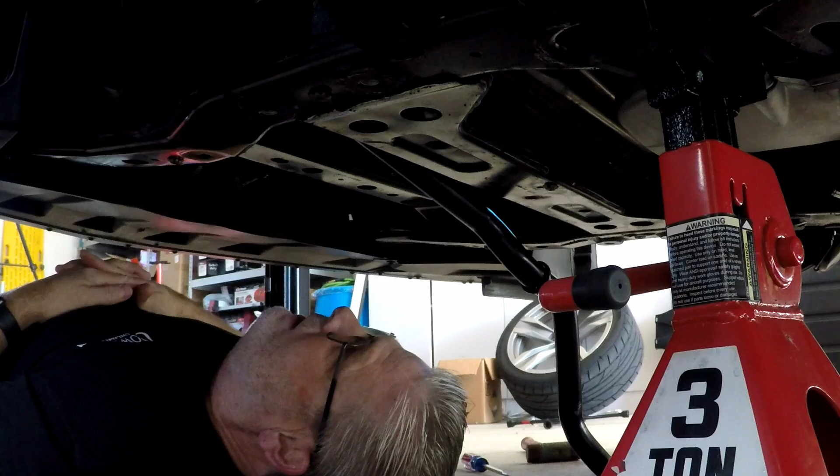This is not easy on the ZL1, folks. The electronic steering and the intercooler pump really make this difficult.

So on the ZL1 they have this belly pan here. That's going to have to come out because this is the front sway bar. So first thing we're going to do is take all this out. It's just one big piece, a bunch of screws.

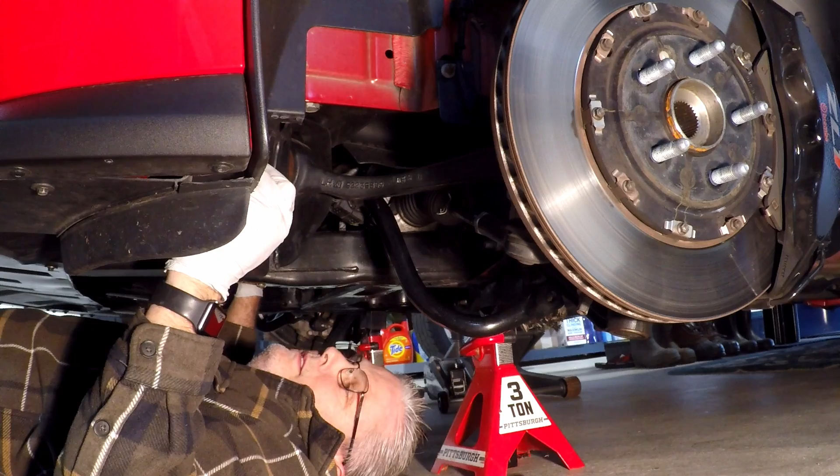You know, Vic, you were right. It would have been easier to do sway bars when I had the whole front end and the steering thing out and all that.

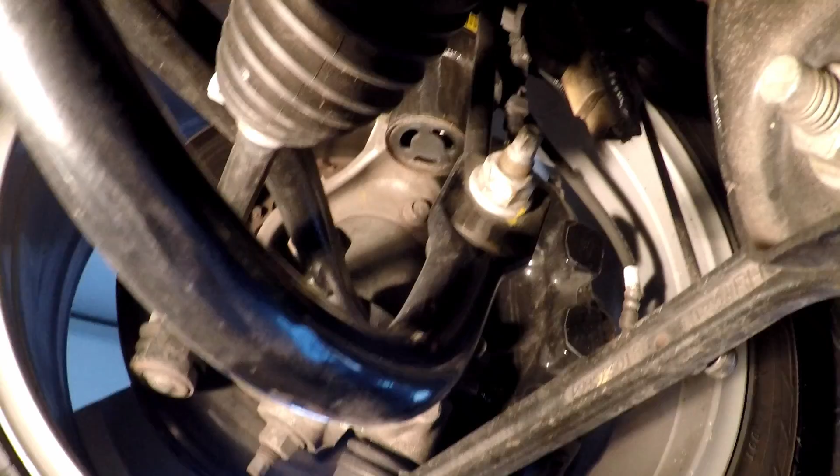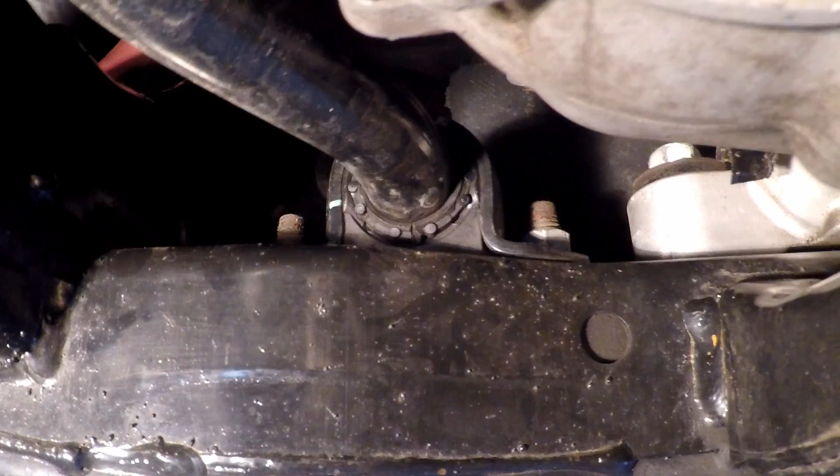Alright, so now that we have the car in the air and the belly pan's off, we're going to go ahead and loosen up the hardware that holds the sway bar in. We're going to loosen up all the nuts on the end link as well as the bushing that holds the sway bar to the frame. These will be a lot easier to get to with it up in the air than me crawling around on my back.

So I'm going to go ahead and loosen these up as well as the rear. Even though the rear is going to be a lot easier to do, it's just easier for this old man to just do it right here.

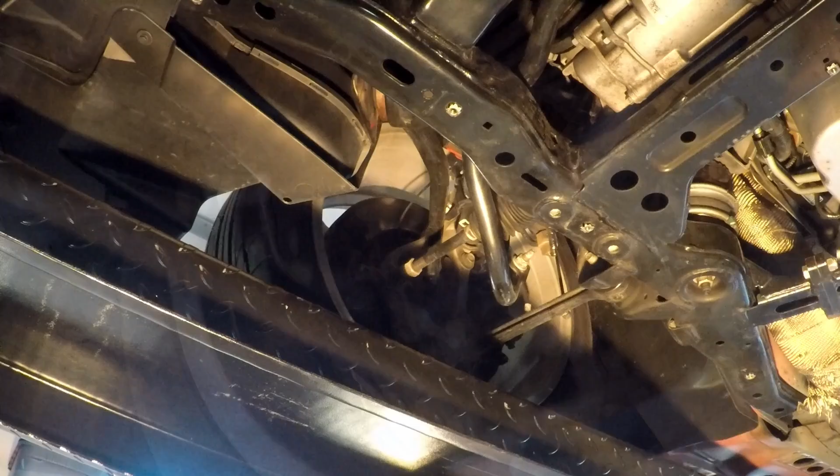Okay, so the end link nut is an 18 millimeter. That's not bad. One thing, you're going to have to grab a small wrench and hold the end of the bolt while you loosen the nut, because otherwise the bolt's just going to spin in there.

Okay, so if you are wondering, you can hold this bolt with an 8 millimeter. The nut is an 18 millimeter. So I backed them all off. I'm just going to finger tight them for now so I can get the car off the lift.

Now I'm going to tackle the bushings. Those ones are kind of tight in there. That's going to be fun. I think I'm going to try a socket on that.

The car's dirty. So I ended up using a 15 millimeter on this flex head just to kind of get in here, just to get them broke loose. They're not very tight, but I really think it'll be easier to get them completely off from up above.

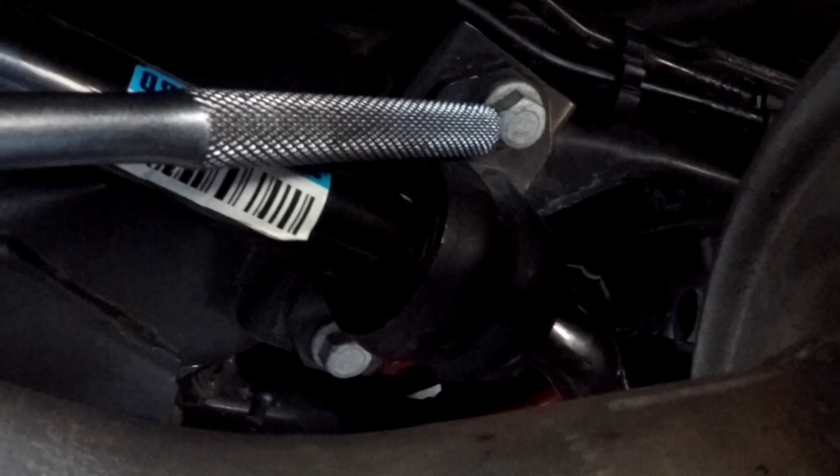Okay, so the same goes for the rear. They're 15 millimeter bolts, and these are really easy to get to, so they'll be no problem for you. The rear end link bolt and the nut on top, they're both 15 millimeter.

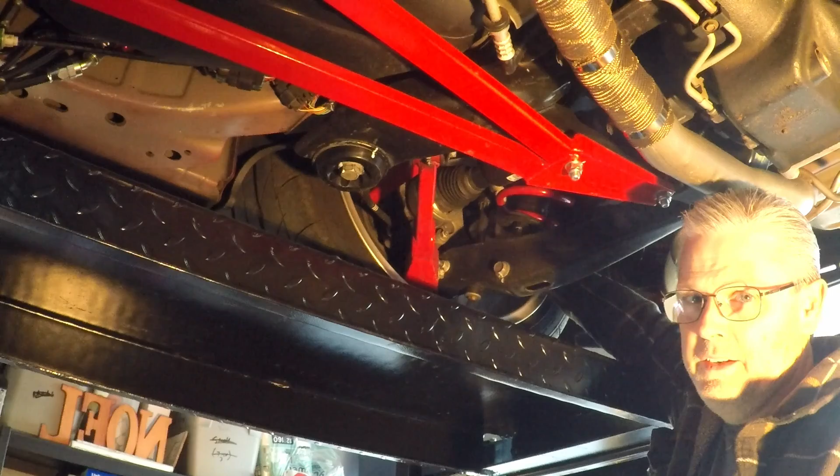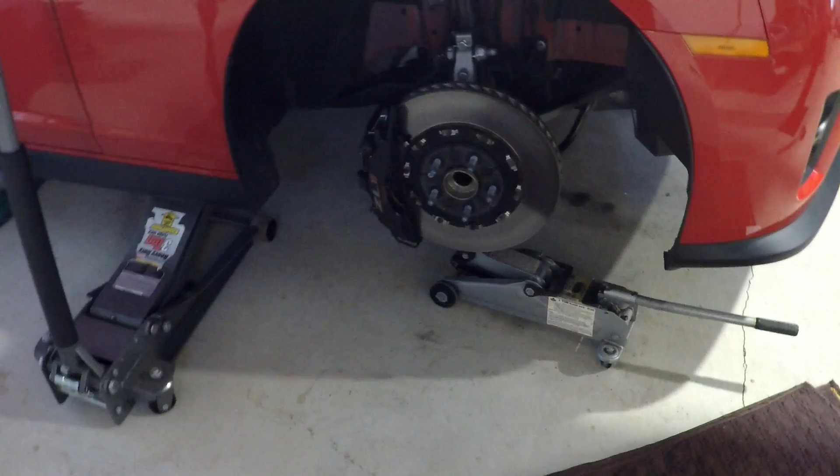Alright, it's coming off. It's coming out, so we're good for now. Time to get it on the ground. So as I worked out, it's actually easier for me to take off both wheels.

You'll see the end link is still in the sway bar because it's actually kind of frozen in there. Not so much frozen, it's just the weight of the wheel, because it's jacked up, is putting pressure on it. So I just want to jack up the lower control arm a little bit to relieve that pressure, and it'll come right out.

All right. The other side, I didn't have to jack it up that far. Literally, it was like a half an inch. So now that that's out, we can get the sway bar out.

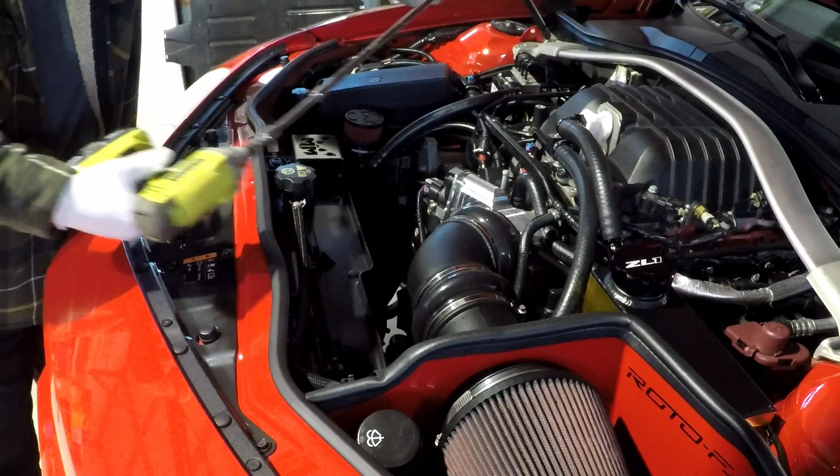There's probably an easier way to do it, but I don't always do things the easy way. Get yourself the 15 millimeter and a swivel and a long extension, and you can reach down there. The driver's side toward the rear is the hardest one.

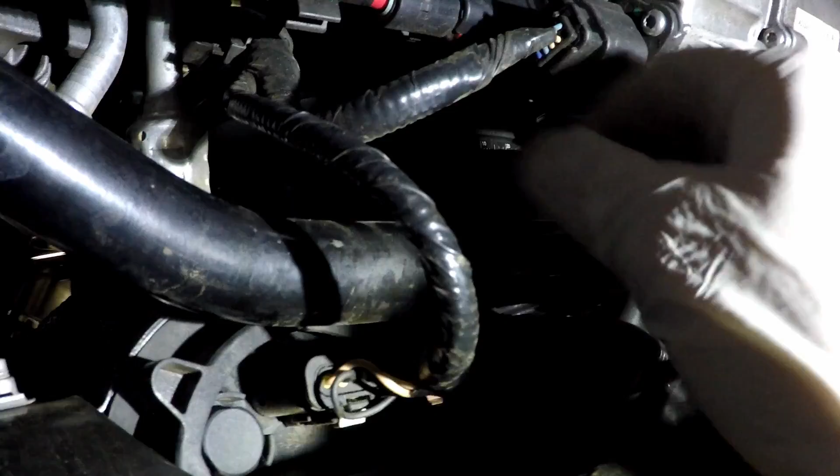So yeah, this wire right here on mine, that's the intercooler pump right there. There we go. Now that's out of the way. And as you can see, the bushing is up and off the studs, and so is the other side over here. So we can go ahead and try to fish that out.

All right, I think I'm going to loosen up the intercooler pump just so I can push against it. I think that might help, along with having this bar up a little higher. I thought I read somewhere where you'd have to move something on the splash shield, and maybe this is just it.

Oh, there's the other nut. I was wondering where that went. No big deal. Just put that up there. Oh yeah, that's gonna make it easier.

They make it look so easy on TV.

I'm gonna jack that up slightly because the end of the bar is hitting on the lower control arm. So I need to move this up about an inch. Okay, so the splash shield on the other side is kind of in the way, so I'm going to pop it off too. So now I got both sides jacked up pretty high.

In order to try to clear that, it keeps running into stuff. So now this bushing on this side is pushing against the cooler lines, and the bar is up against the coolant pump.

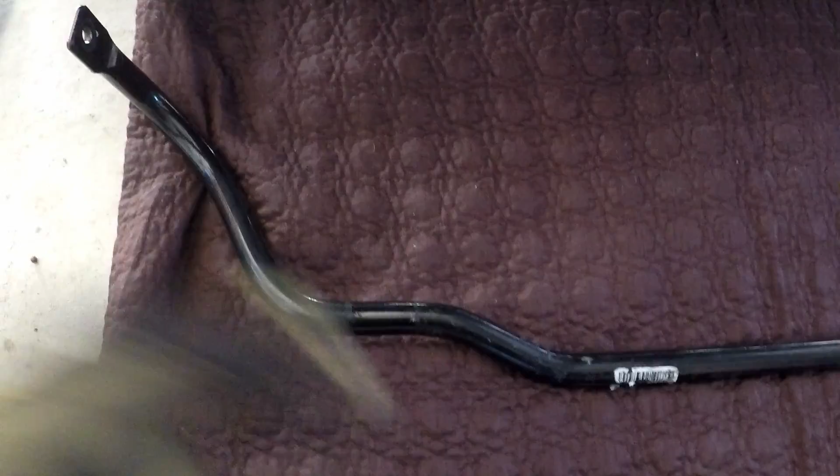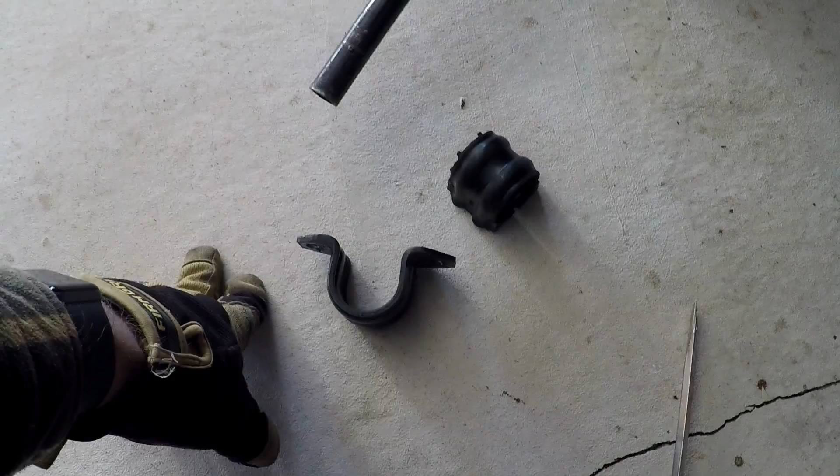So the bar's out. I ended up prying off these, and I just put a screwdriver in there. I had to jack up both wheels to get clearance off the boot because it was wanting to rub on the boot. On the ZL1, you have the electric motor in the way, you have the intercooler pump in the way, and the coolant lines that go by the damper.

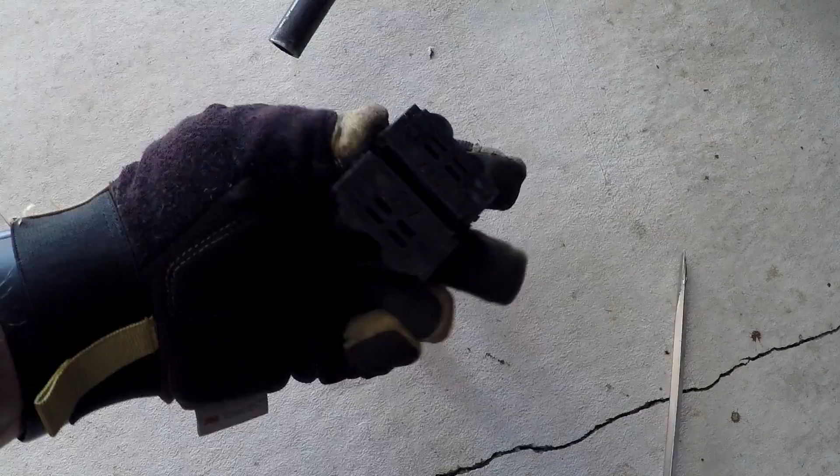These were the main culprit moving stuff around, so I pried these off. These are split, so they just peel off the bar. Once I did that, it was literally just jacking this up to get clearance off the tie rod, and then I fished it out. I brought it this way, and then I dropped it below the passenger side frame rail and just started moving it out, and it's not too bad.

I did not have to jack the engine up. I didn't want to risk breaking the oil pan. It's just a cast aluminum pan, so I didn't want to be jacking on it. So this is possible to take this out without jacking up the engine.

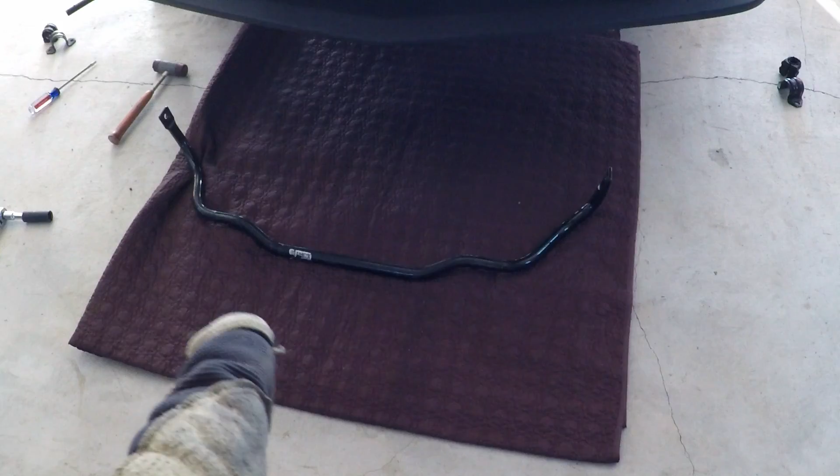So now that I've got it out, let's compare it to the other one. Well, there's a size comparison for you guys. The new one to the old one. So the new one is 100% stiffer than the old one.

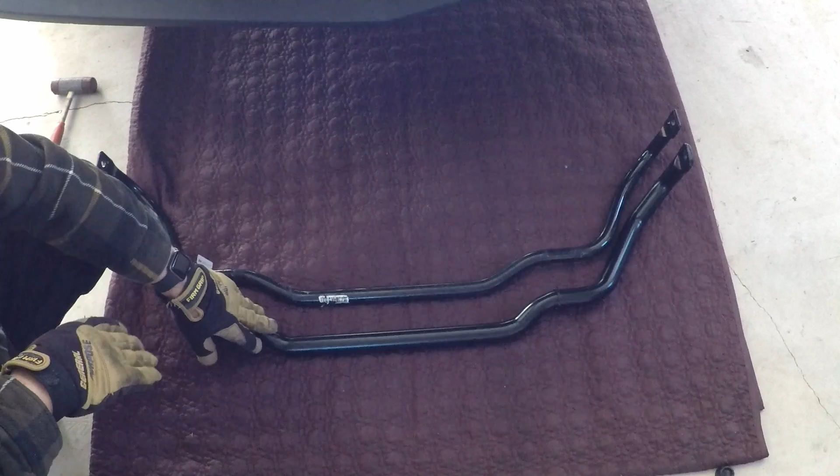The car does have a little bit of body roll. It's not bad. This does a really good job of correcting that. This will hopefully get rid of all of it, just in case I want to do autocross.

But anyway, we're going to put this in now. You know what a pain that was to get out. So, sorry I didn't get footage of that, but yeah, I was frustrated.

Just remember to take the bushings off. Maybe spray them with some Windex, might help you slip them off. They get kind of sticky, but putting screwdrivers in the end of the bushing and just working it back and forth when it's on the end seems to help. Make sure you get your left and your right correct before you try doing this.

So I am bringing it up through the center of the car.

That little ring is getting, there we go. Okay, so now that I got it here past the frame rail, I got to snake it out more toward the driver's side while rotating it to get that other side to go up.

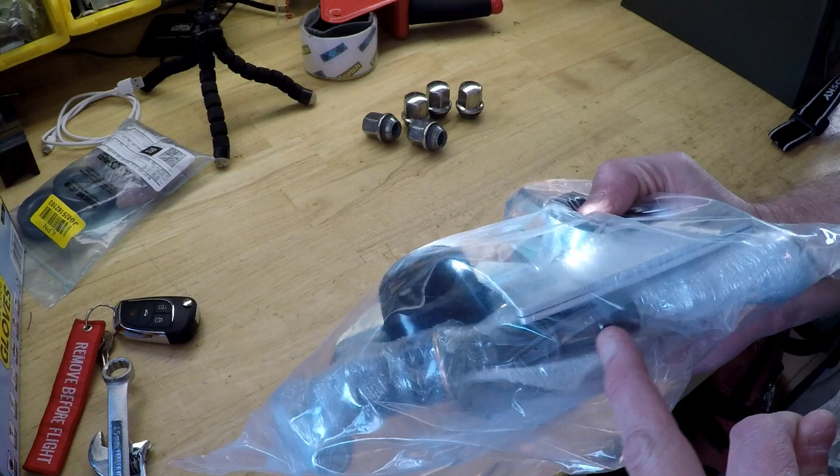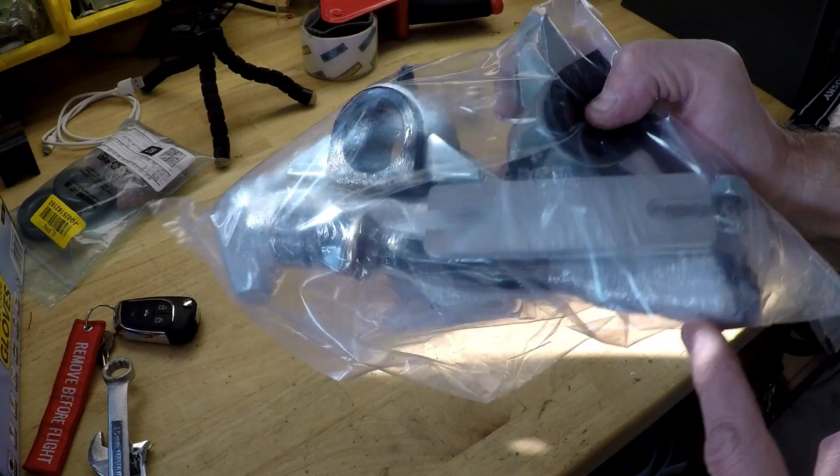All right, so the front and rear sway bar come with two. I got these mixed up, so according to the instructions, the one with the 90-degree zerks are for the front, and you can aim them in or out, whichever way makes it easier for you to grease. And then the ones with the straight zerk are for the rear. It also has the end links, because when you change the bar, where the end links mount to the bar, you have 3 different positions. Your end links may need an adjustment, and that's what those are for.

So they give you some blue Loctite. They also give you some grease.

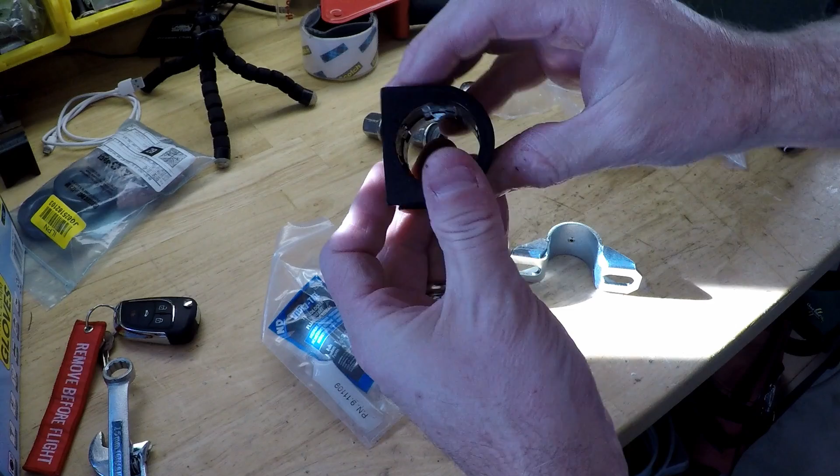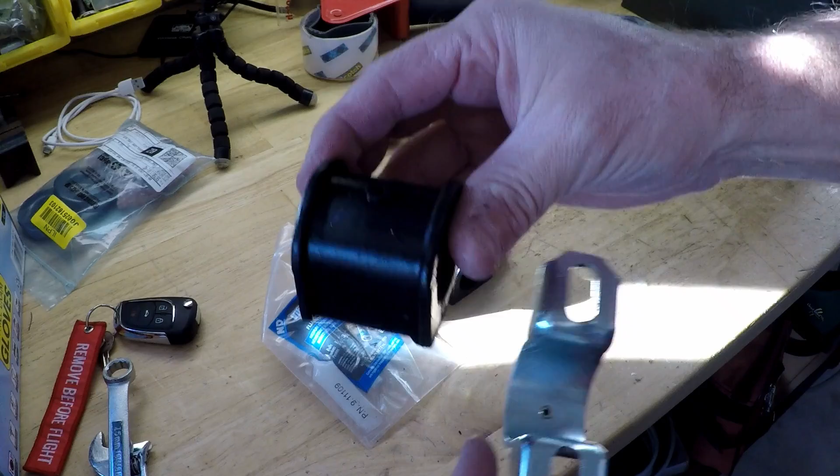So you want to put the grease in here and put it on the bar. Like that little hole there is supposed to line up with this, I suppose. Yeah. Hope it does. Supposedly it will.

Okay, so I guess that's why that doesn't quite matter. So you're going to get grease all over squeezing out of here between this and the poly, but supposedly the grease is going to go down in that hole there.

So we're just going to, now the Loctite is for the nuts that you're putting back on with this. I'll have the torque spec for that when I get to it for you guys.

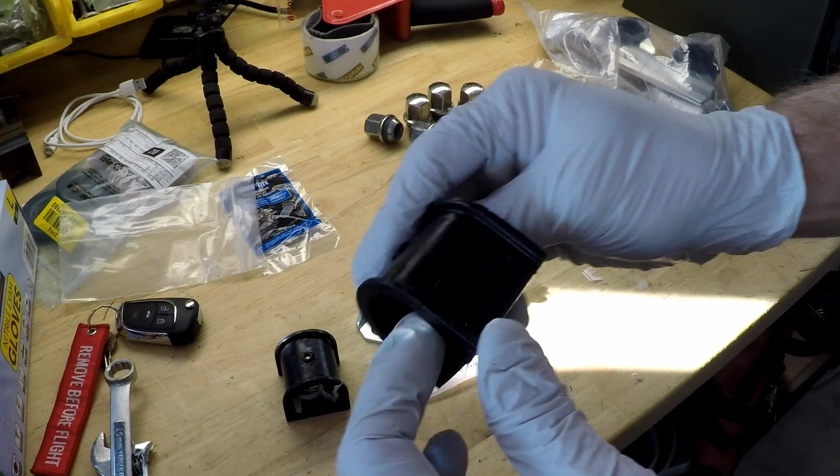Not like that for now. This one, I have more of this stuff. I just want to use theirs up.

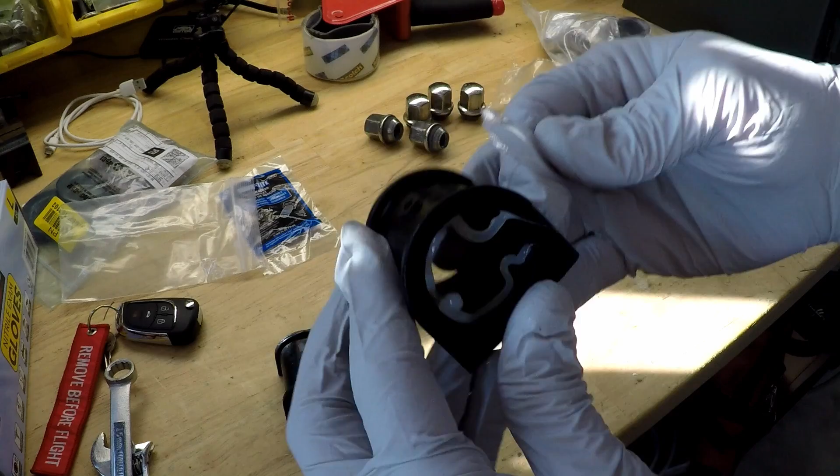Well, one thing I'm sure of, the rear's not going to be this hard.

Everything is in the way. So really the freaking motor's in the way.

And you know what? The motor's attached to the rack, so it's not going anywhere. The rack is attached to the frame, not the engine. So the engine actually isn't in the way. It's the electric motor for the steering.

And those bolts are only accessible from the top. Well, yeah, I can see them here. They need to be in a certain spot.

The tie rod end is in the way. It's just really in the way.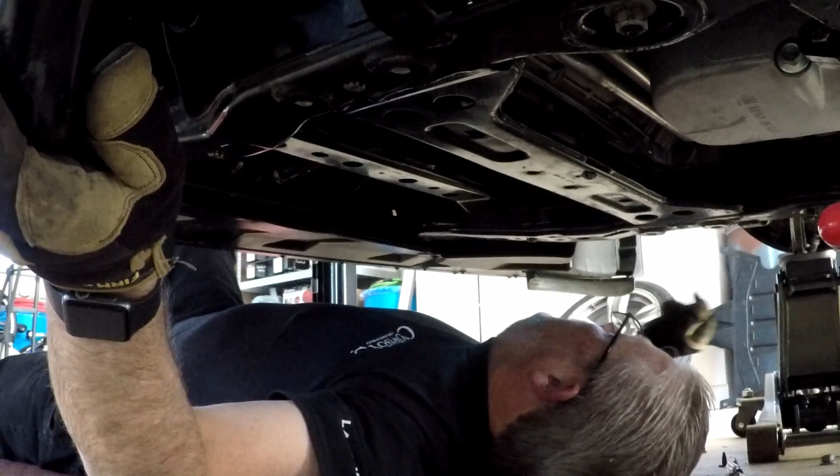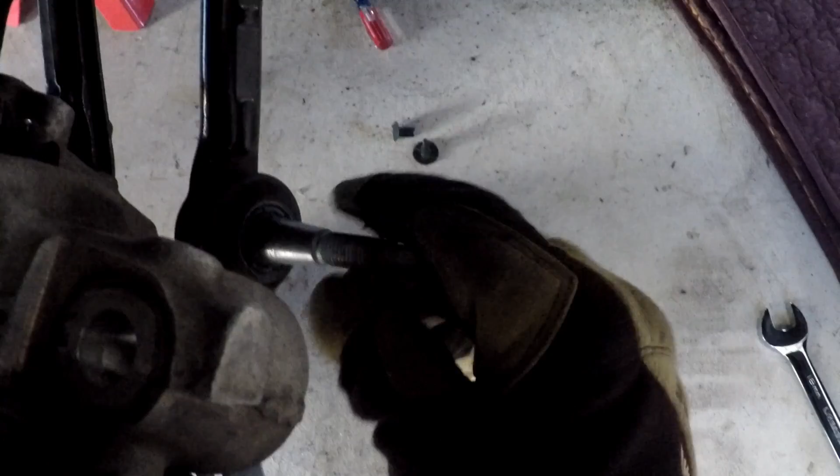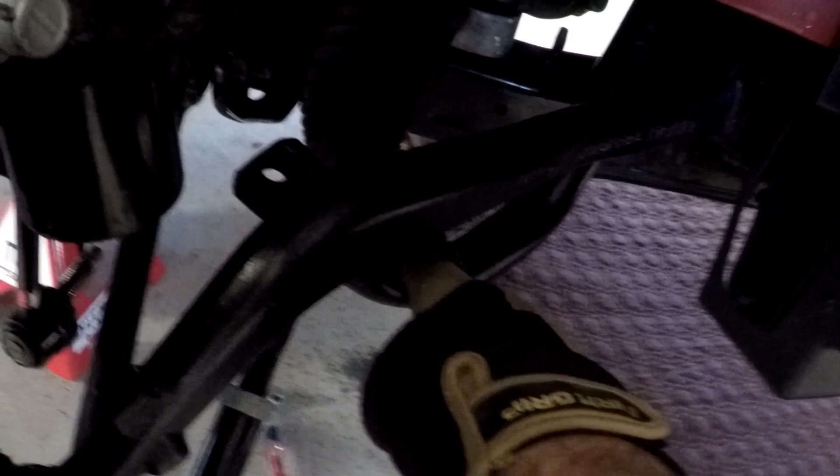Okay, so here's the sway bar. I had trouble getting it past this boot, so I actually took the tie rod off. Just took the 18 millimeter to it, pulled the nut off, drove it out. Wasn't hard, and then I rotated the whole spindle. I straightened it out and jacked up the spindle enough to push this back far enough to get the sway bar to clear the boot.

So it's in the proper spot now. I just need to line it up and put it back together. Okay, so this is how you want it to sit in there. It's between the lower control arm with the tie rod on the inside of the loop.

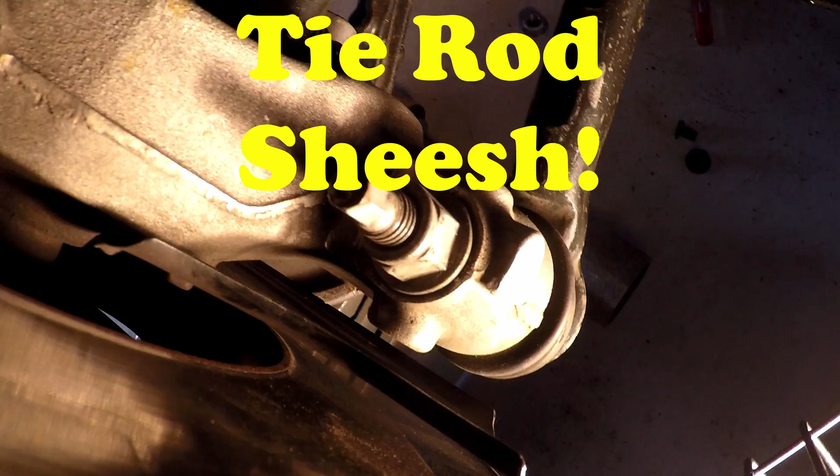Now we can go ahead and lower the spindle down and reinsert the tie rod into the spindle. So the tie rod is back in. I'm going to torque that before I put the wheel on.

So now we can go ahead and attach the end links to there. Well, let's see what the instructions say. I might have to put the bushing on first. Okay, no lie guys, that's hard to get in there with everything in the way. The ZL1 is not an SS.

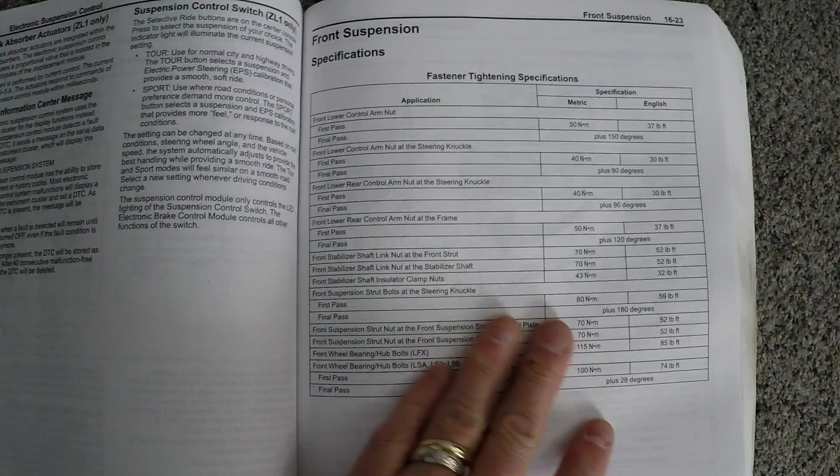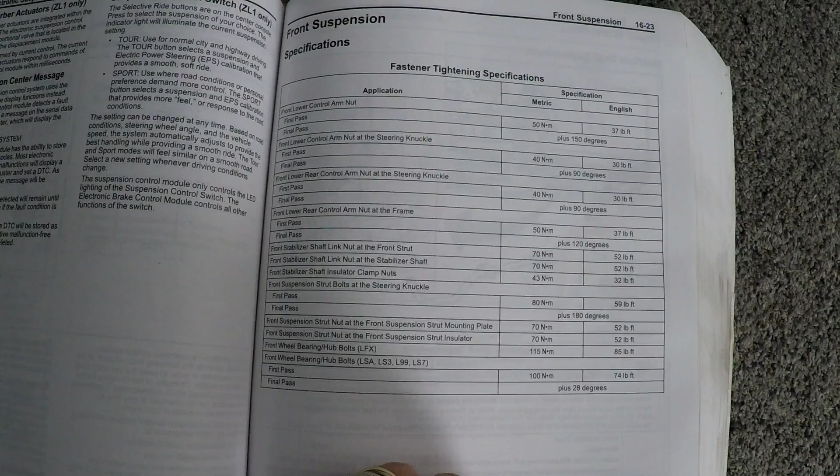So this is the service manual for the car with its torque specs. Lower control arm, stabilizer shaft link nut, stabilizer shaft insulator clamp nuts, 32 pounds.

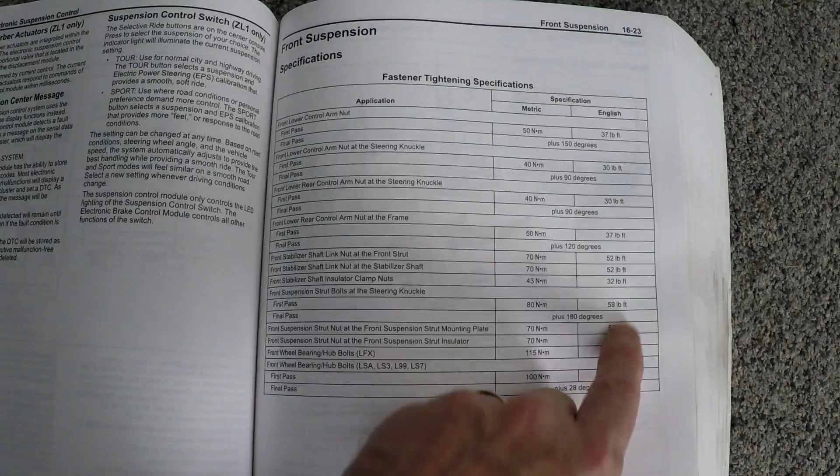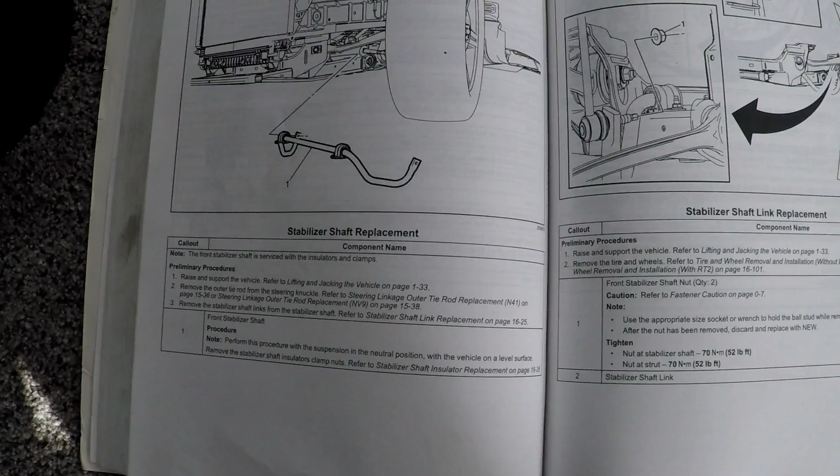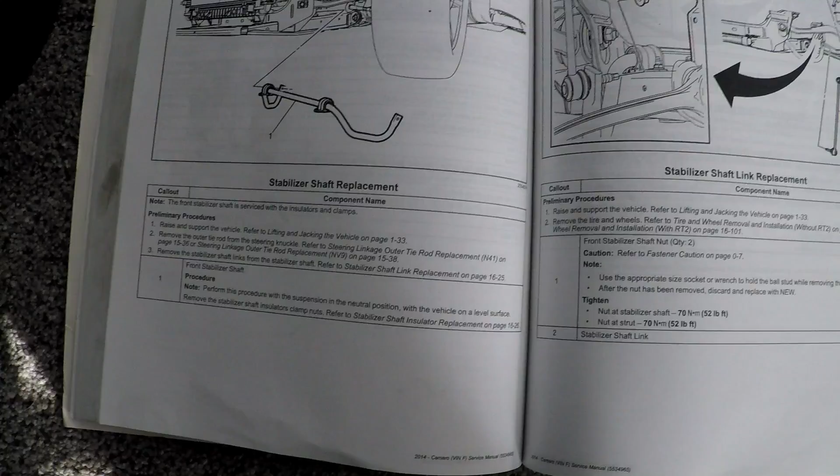Yeah, they don't give much information here. The only thing they say to do is to remove the outer tie rod, which we had to do on the passenger side. They make it sound so simple, but it's really not. They're saying to do it with the suspension in the neutral position. Yeah, I had to move it around quite a bit.

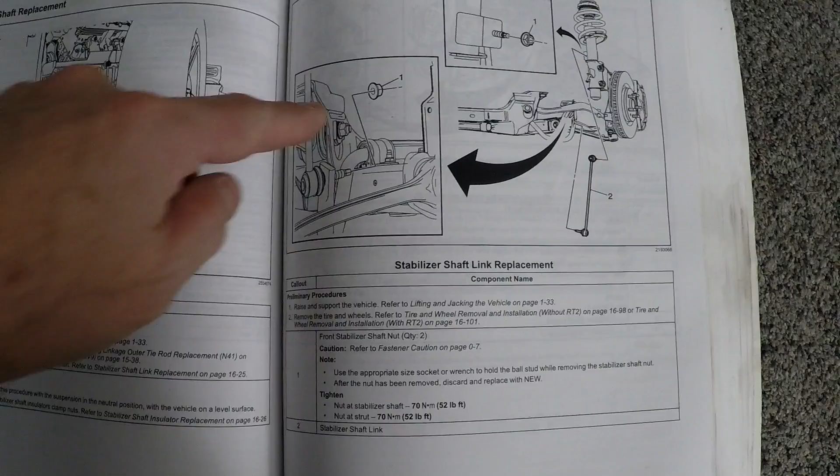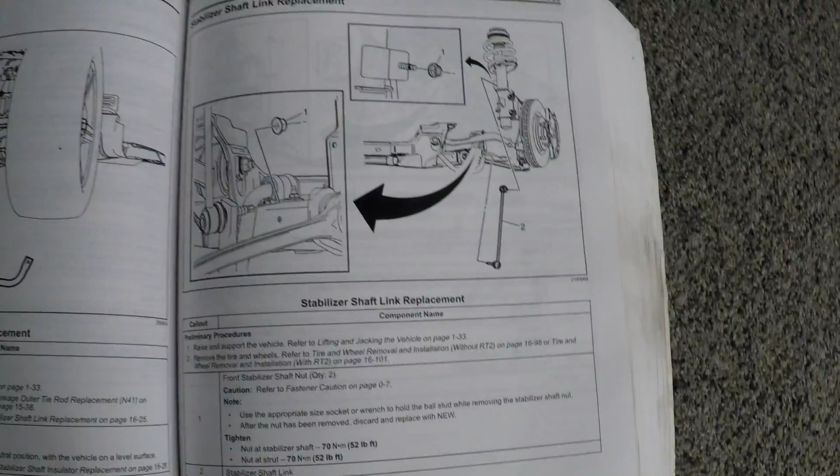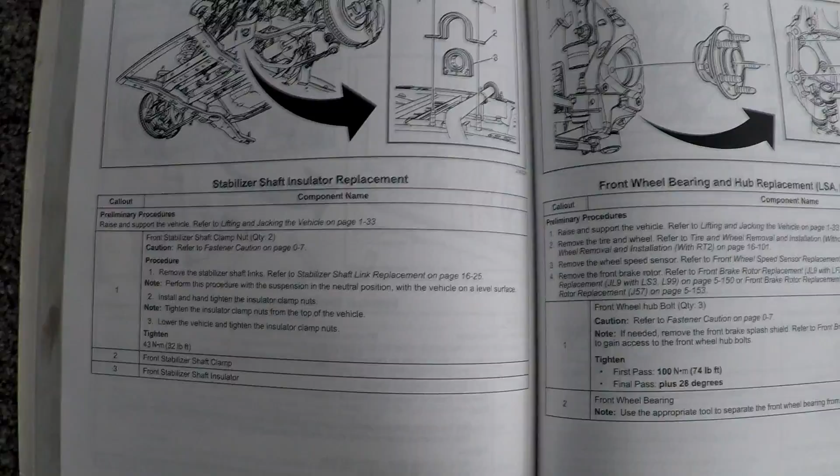So the end link, front stabilizer shaft nut. They're saying 52 foot-pounds for that. Seems excessive. The bushing nuts, 32 foot-pounds. That sounds reasonable.

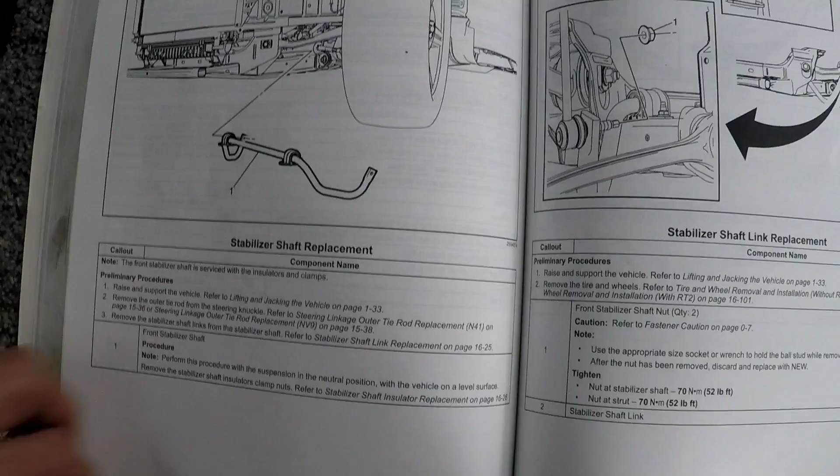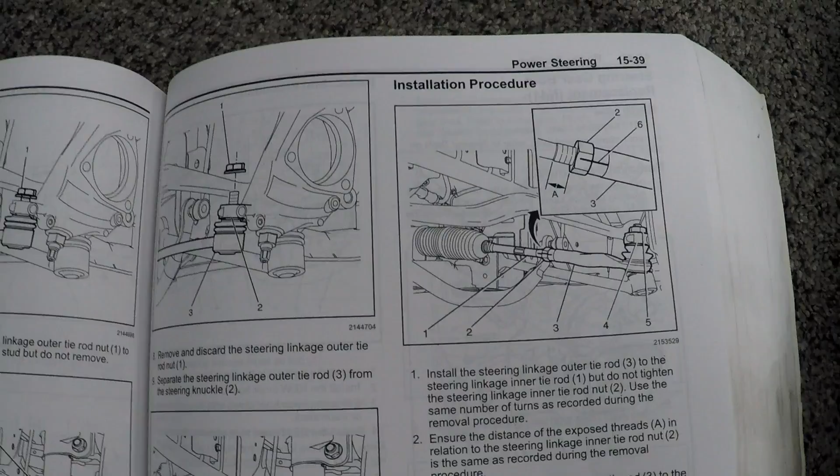So here's the outer tie rod installation procedure. So the nut number 5 right there, they're saying to tighten it to 22 foot-pounds and an additional 120 degrees. That's interesting. Usually that means a one-time use.

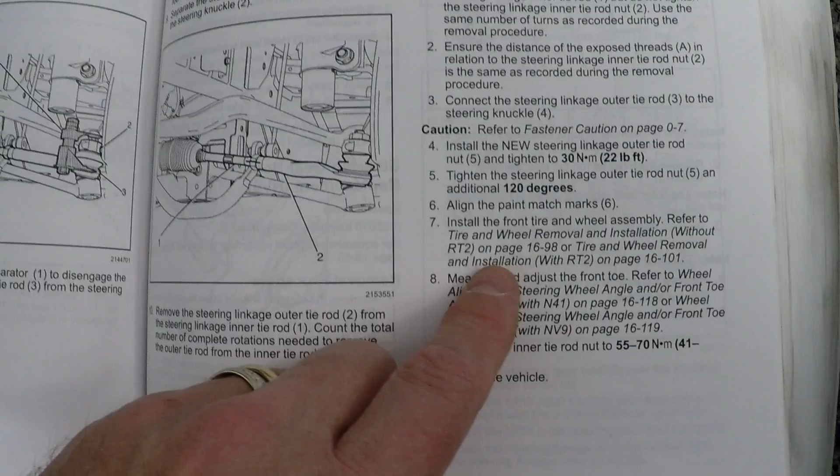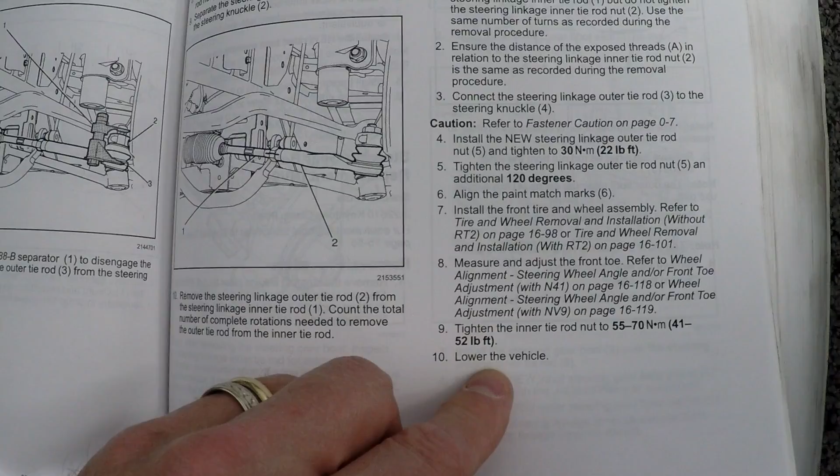So I'm going to go ahead and do that, but I'm going to put some blue Loctite on it because I don't think the thing will come out, but let me tell you what, if it does, it's going to be a problem. The inner tie rod nut is this one. We're not going to be moving that one. Didn't even loosen it.

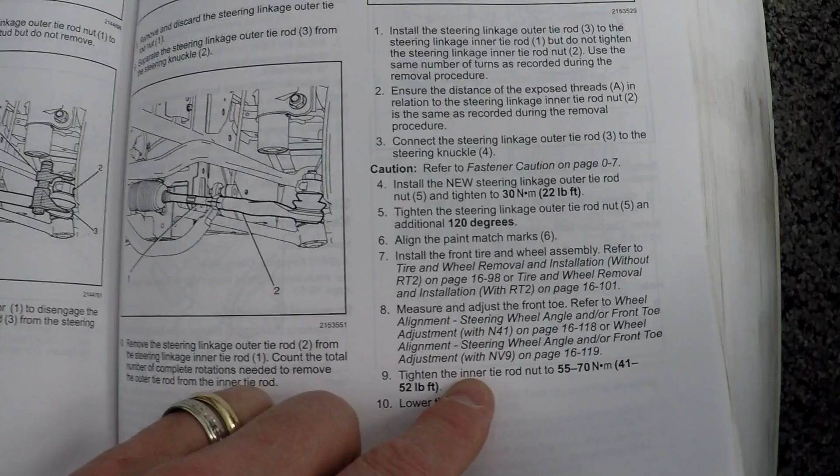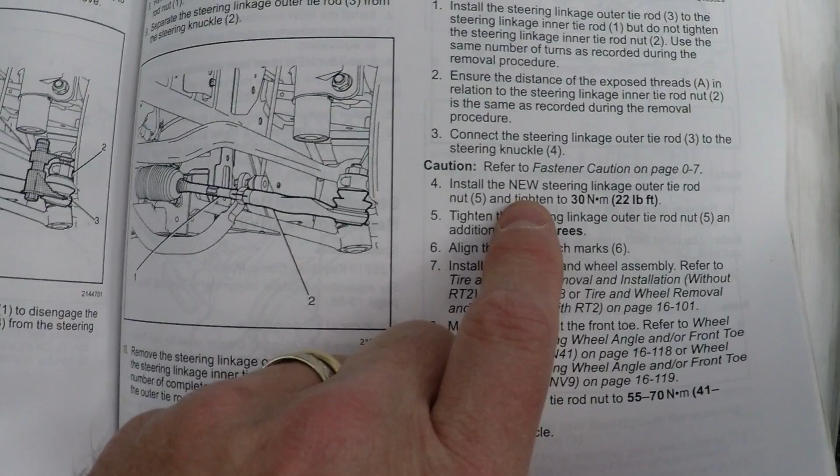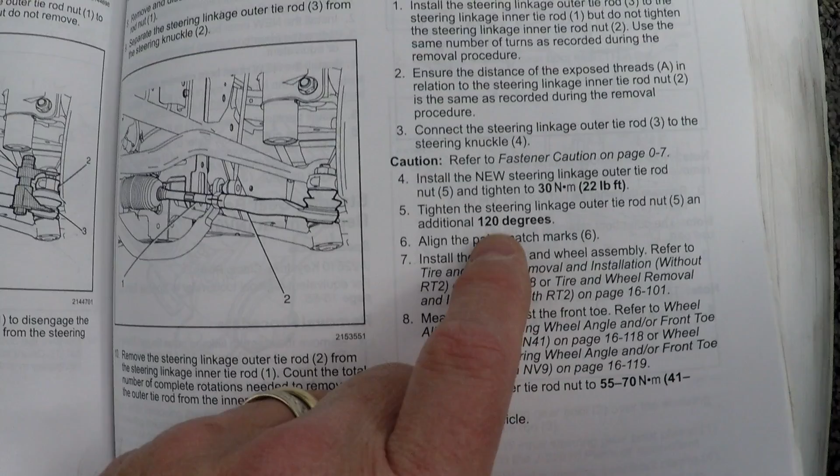See, they're saying to use a new nut. So a new nut should be used, probably because it's a locking nut. I can feel it when I'm tightening it. So maybe get a new nut, 22 foot-pounds plus 120 degrees. That usually means you're stretching a bolt when they do that. So I don't believe they're stretching the tie rod threads, but 22 foot-pounds plus 120 degrees.

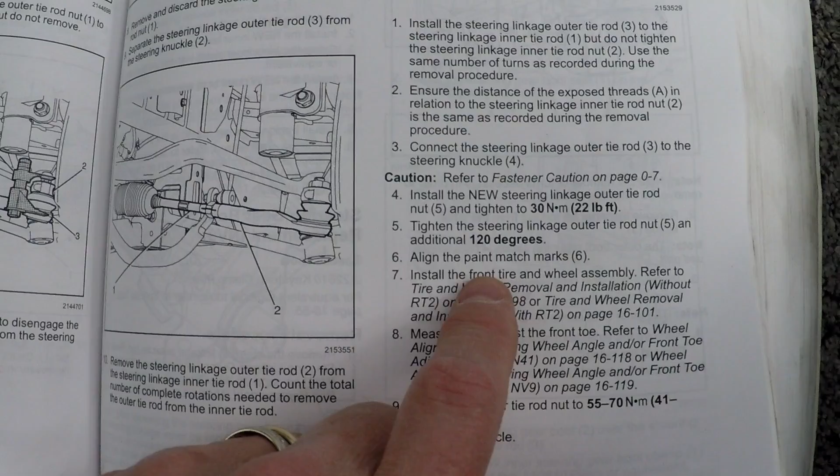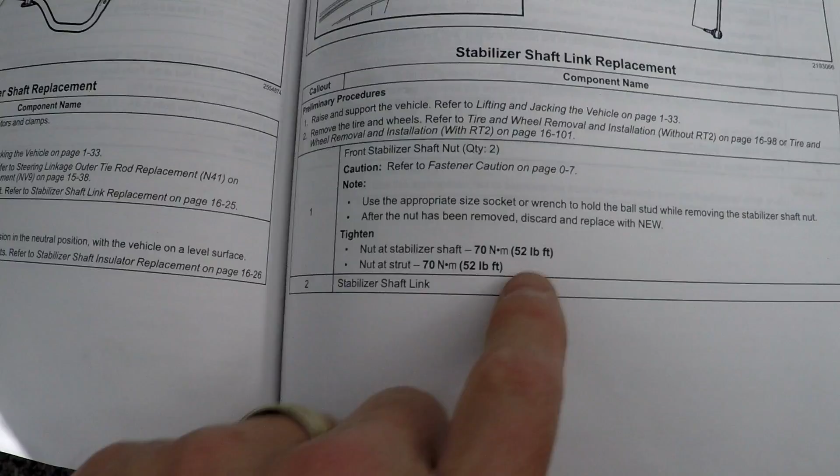Yeah, that's a third. End link, you're saying 52 foot-pounds. 32 foot-pounds.

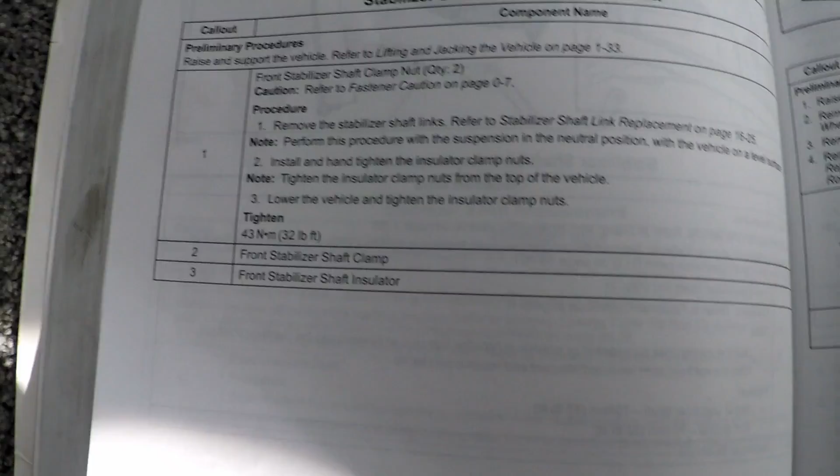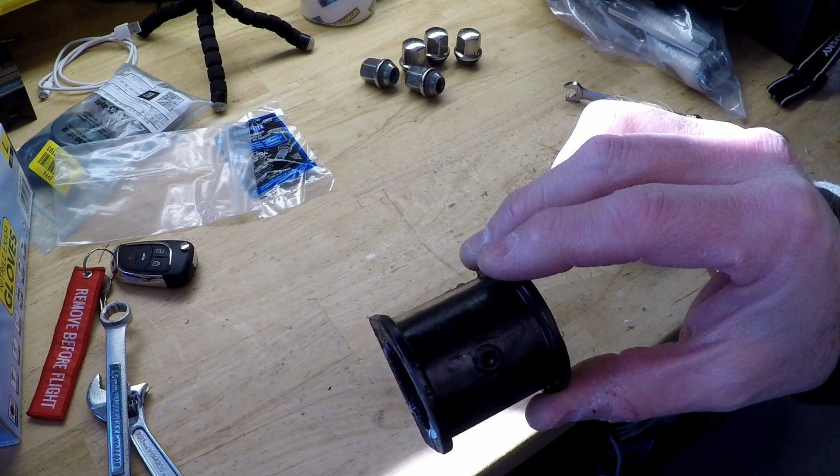Okay, we got the grease all in there, lots of it. And I didn't put any grease on the outside here. I don't think it's gonna matter. If it squeaks, it squeaks. I suppose you could, if you wanted to, put a little grease on here. Might not be a bad idea, just to keep the poly from squeaking against the bracket itself.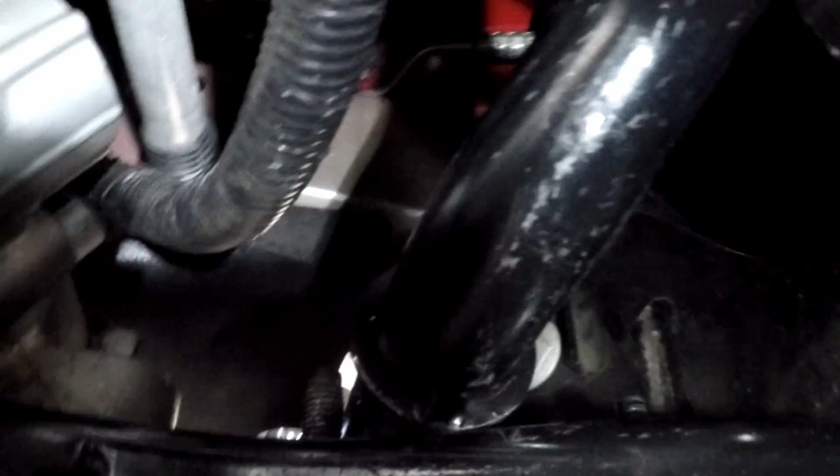Alright, so as you can see, the ring on the sway bar is going to go on the inside of the bracket and the bushing. So I need to get the rubber around on the back side of that. Well, that bar really got all that paint banged up. I guess I'm glad I didn't paint it red.

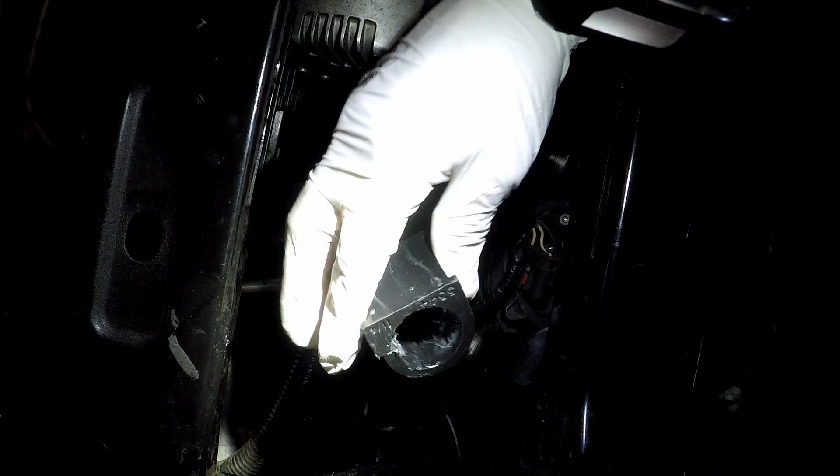Okay, that was super easy. So I'm putting the Zerk toward the inside of the car because I can put it up on the lift and grease it. Oh, that went on easy. Super easy. Right over the studs, just like that.

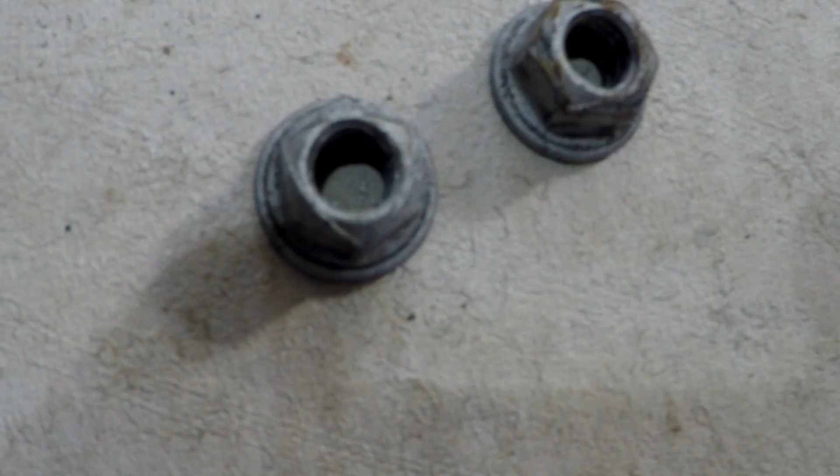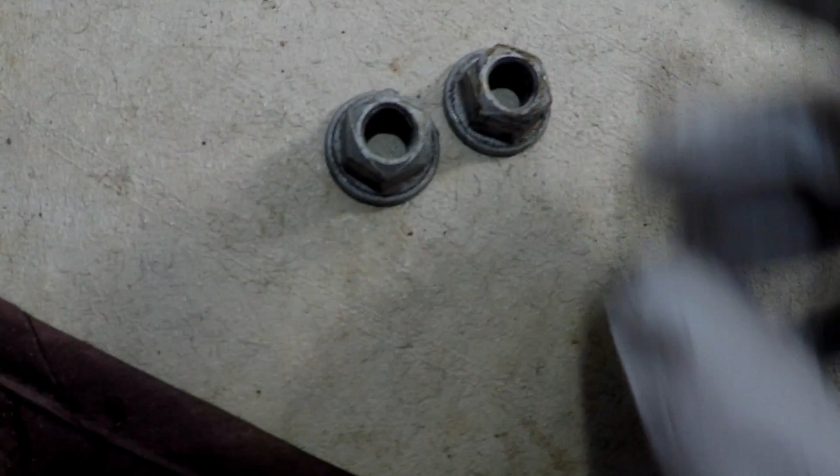So these are the nuts for the bushing bracket. These are a top locking nut. These are considered a one-time use. I know a lot of people that get 2 uses out of them because they'll still tighten up. But if you try doing that, you better put some blue Loctite on, which is what I'm gonna do.

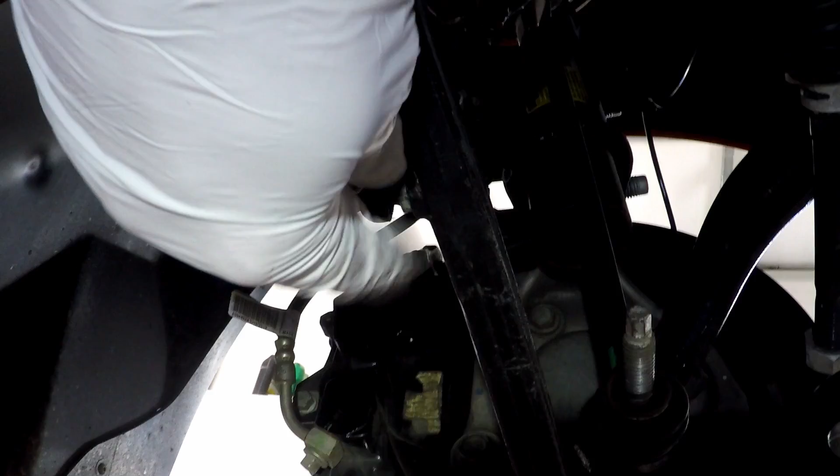Alright, I put the magnetic ride control sensor ball stud back in the lower control arm. This just pops on and off, so 10mm for that. I took it off to help with clearance on the bar because when I was trying to install the bar, it was hitting it. So I got the nuts just loosely on here for now.

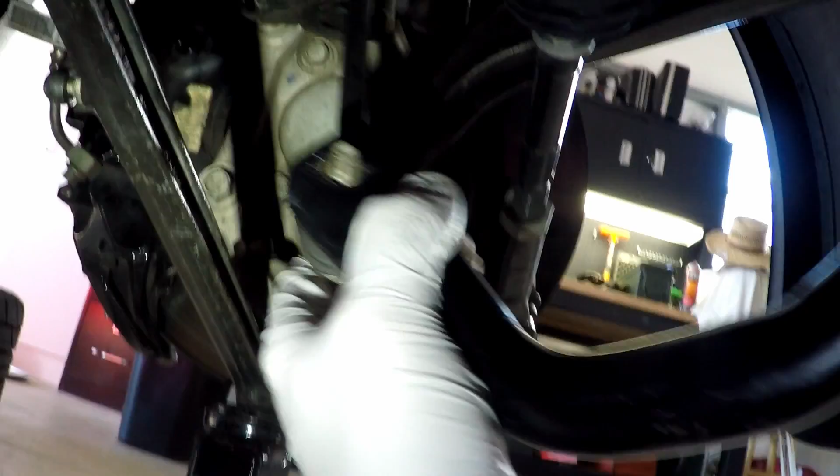Same thing with this nut. It's a top lock meant for one-time use. Like I said, I know people that use them twice, any more than twice, and they're just too loose. I can feel that tightening up. But that's going to get some blue Loctite as well. We're just putting it there for now.

And same with this side. Again, I still need to torque the lower control arm, I'm sorry, the tie rod end.

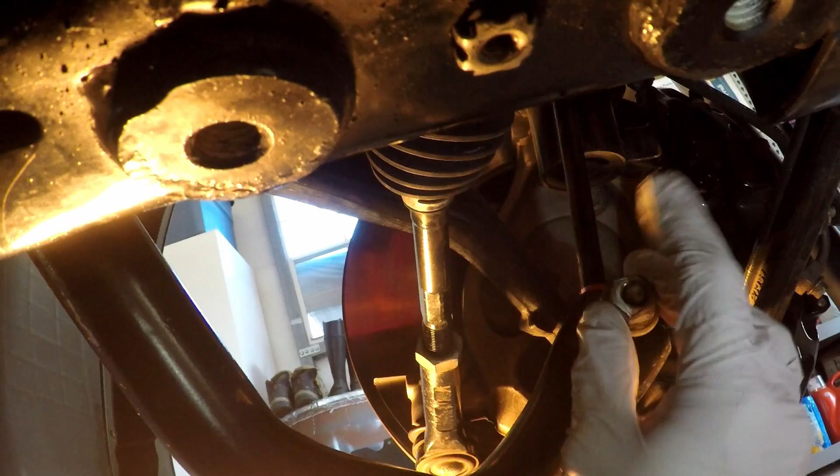Okay, so the bar is in, everything's connected. So we can actually get this put down on the ground and put blue Loctite on all this and secure it.

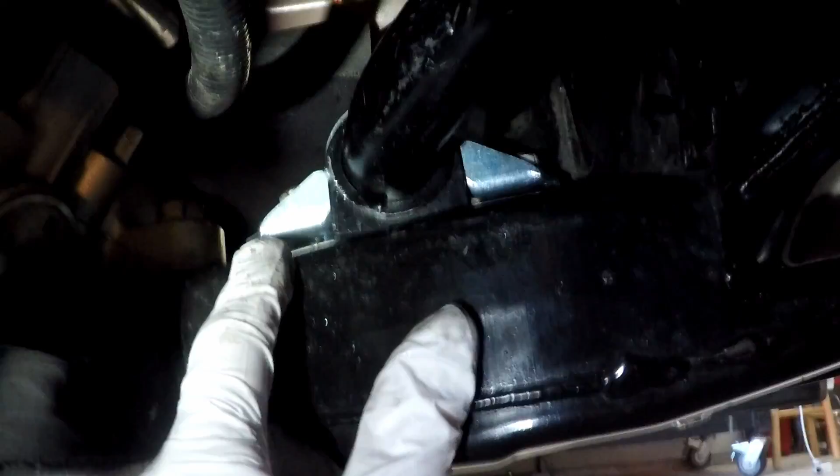I do want to tighten down the bushing ones all the way down. I'm not going to torque them, but you can see how it's lifting up right here because I attached it. I don't want that. I want this completely flat. Even if I have to move it, it's going to shift, but I don't want it pushing up against the nut when I've barely got a thread on it. So I'm going to tighten those down with the wrench, but allow this to slide a little bit, but get a lot of bite on that thread because it's going to be pushing up against it.

Same with these, I'm going to bring these down. These will rotate, so that's not a problem. These can be torqued now if you wanted.

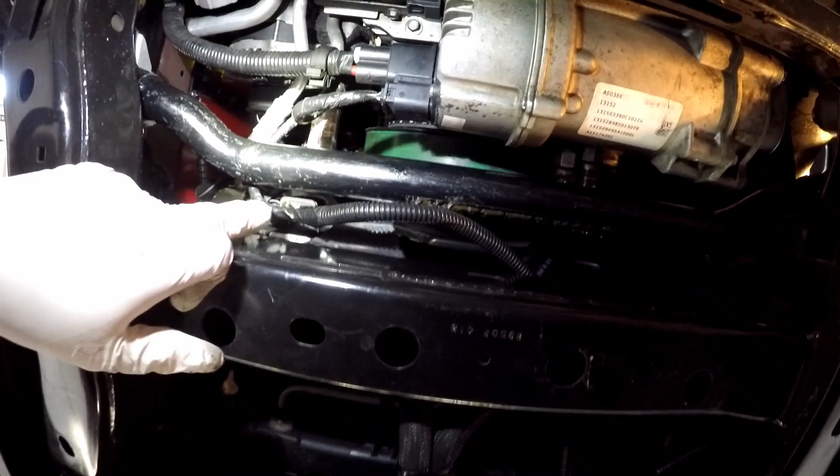So I did reroute the wiring for the intercooler pump harness, it was wrapping around the stock bar on this, and it was kind of tight, so I just moved it out of the way. It literally, you could probably do it even with the bar in the car. I did. And then I reattached the bolts that held the intercooler pump, so they're tight. So that's ready to go.

Now the bar can still move. Obviously I don't want it jammed up against that plug, so I'm going to move the bar toward the back of the car and tighten down the nuts over here so we can get the car on the ground.

Whatever. Now we're on the top side. You can see the bushing and how the zerk's facing. That'll be fairly easy to get to.

So I'm going to buzz these nuts down from the top side here, just a little bit to hold them in place. Alright, so we got the tie rod.

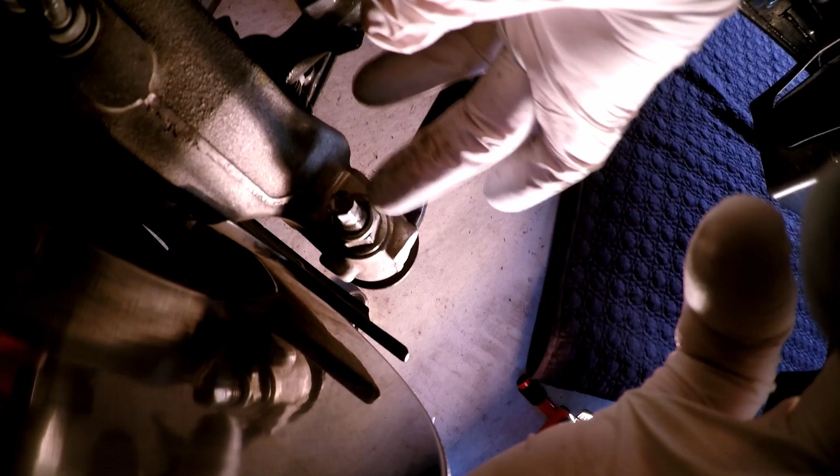I put some blue Loctite on that. That is a nylock, it's not a top locking nut. So I put blue Loctite generously on it, on the threads. Put the nut down, 22 foot-pounds with the torque wrench. This didn't spin like it was wanting to coming off. So it tightened up, 22 foot-pounds, and then 120 degrees rotation with the 18 millimeter.

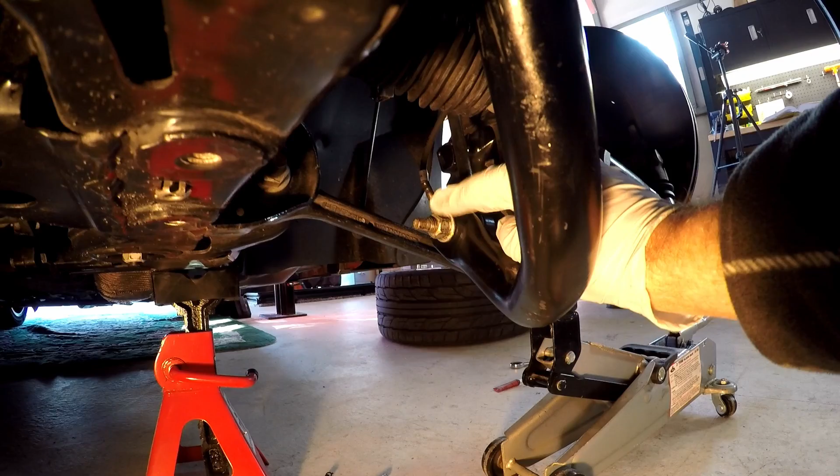So since the end link is actually a ball joint, I went ahead and put the blue Loctite on the nut, 18 millimeter socket, and that's 52 foot-pounds. Now I did have to hold this with the crescent wrench while I tightened this down, but once it got to a point, then I was actually able to torque this without the bolt spinning. So 52 foot-pounds, and that'll still move to neutral when we get the car on the ground.

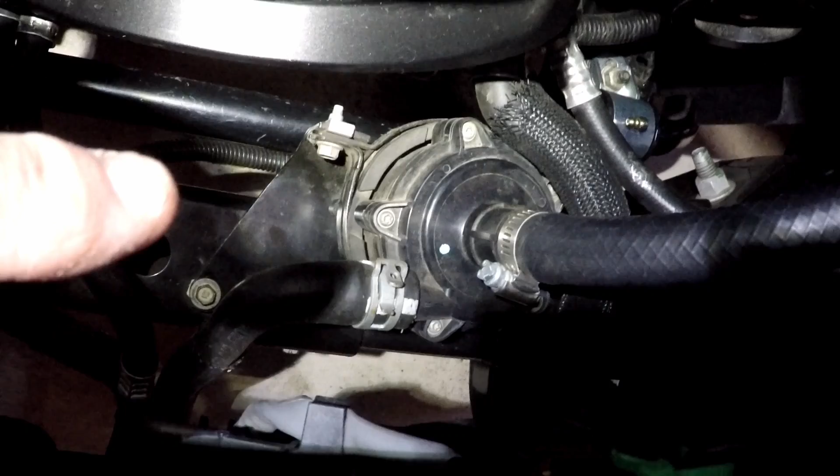So I've decided on the bushing mounts. Now I moved that bushing on both sides as far that way, as far to the rear of the car as I could, because if they were toward the front, it would have been running into my pump connector that I was talking about earlier. I didn't want the bar smashing up against the connector. For one, I want to be able to get the connector off, and I don't want it damaging it.

So because I positioned the bar this way and tightened them down, I'm going to go ahead and take one nut off at a time, put blue Loctite, and tighten down to 32 foot-pounds, and call it good where it's at, because I know it's away from that connector and it's not going to hurt anything. So there's nothing in the book and there's nothing in the instructions that say that should be in the middle or one way or the other. So it may make a change on the stiffening slightly.

I don't think it's going to be a lot to worry about. I'm not going to worry about it because I'm more worried about that connector. So I'm going to take those nuts off one at a time, put blue Loctite, and then retorque to 32 foot-pounds. The car is back on the ground, got the wheels on. I still need to torque those to 122 foot-pounds for this car. So we're done with the front. Finally, what a pain. And now we're going to move to the back.